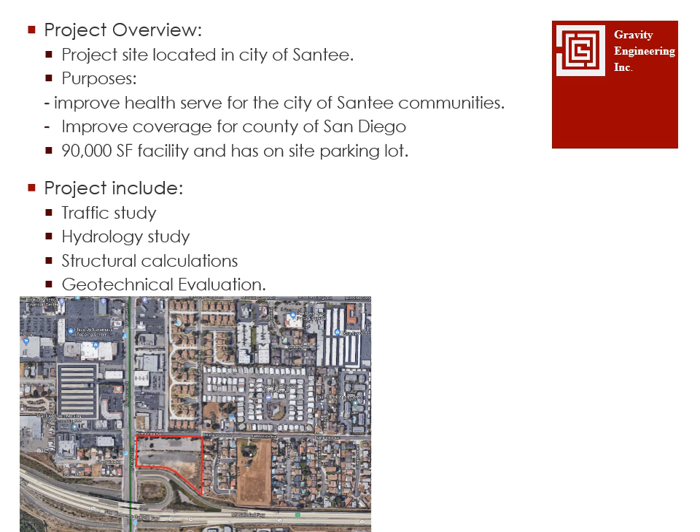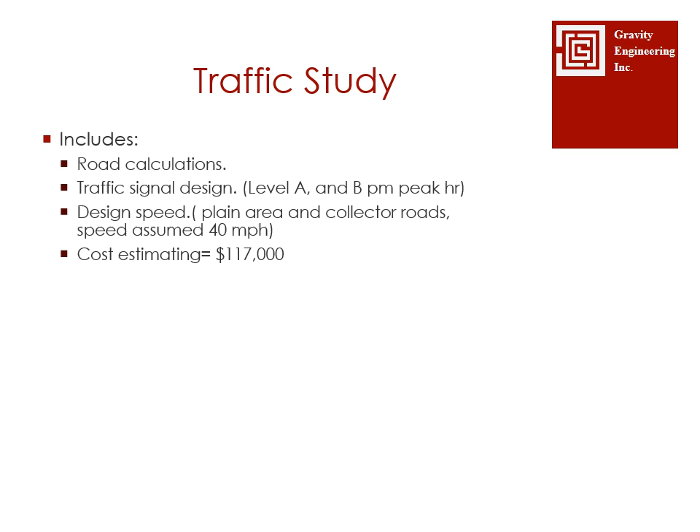This project includes traffic study, hydrology study, structural calculations, and geotechnical evaluation. The traffic study includes road calculations, traffic signal design, design speed, and cost estimating.

The traffic study of the project is located in the city of Santee, and looks at the impact on the Cuyamaca Street and Buena Vista Avenue intersection. This study will help to know the situation of the area for car movement and average daily traffic.

The roads around the project site are collector roads, and the area is plain, so we assume the speed is going to be 40 miles per hour. We redesigned the traffic signal design, and we find that the level of service is going to be A, assuming the volumes.

Also, according to the city of Santee, the intersection of Cuyamaca Street and Buena Vista Avenue has a level of service A during the AM time and a level of service B during the PM time.

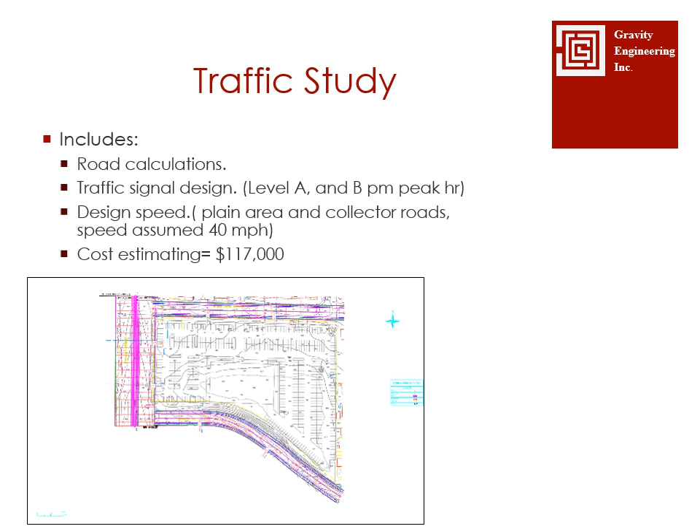This is the water and sewer study, and this is the project site plan. In water and sewer, we did the following study.

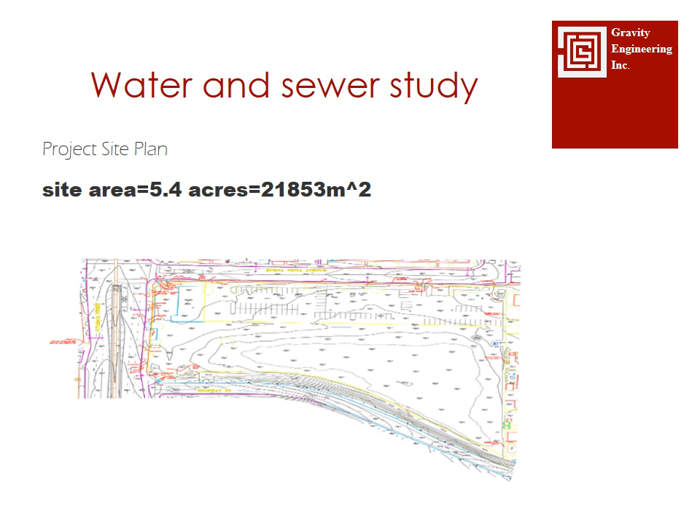To find both average and maximum water demand, the average population is 500 and the average per capita demand is 60 liters per day. Using those numbers, we calculated the average and maximum water demand. The average water demand was 30,000 liters per day, and the maximum water demand was calculated using a factor of 1.5.

Which gives us 45,000 liters per day. Also, both peak hourly consumption and fire demand were calculated as the following: 67,500 liters per day for peak hourly consumption and 716 liters per minute.

For fire demand, the largest water demand turned out to be 1,076,040 liters per day. Finally, the study showed that the design is compatible with current water and sewer limits. Therefore, our recommendation highlights that an upgrade is not required.

Hi, this is Mohammed. I'm going to talk about the structural study of our project. The main objective of this study is to do a structural analysis and design for the medical office building for Sharp in the city of Santee.

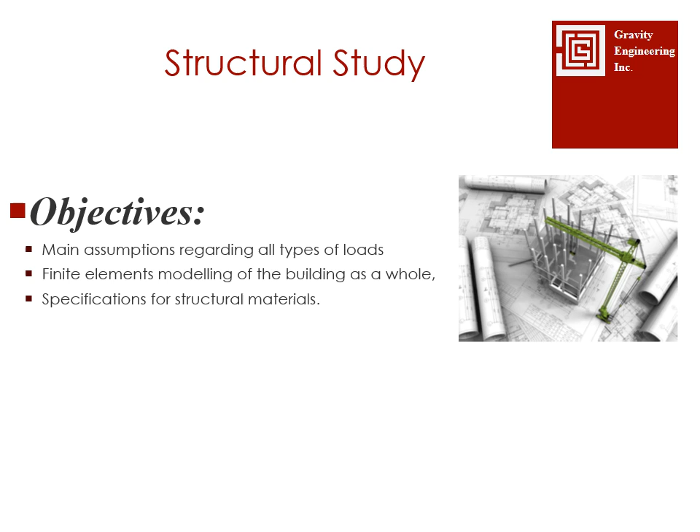To design our building in this project, we relied on using some of the common standards in the industry. For example, we have the ASCE, the American Society of Civil Engineers manual. We use the AISC, which is the American Institute of Steel Construction, and finally the IBC 2015, the International Building Code 2015.

For this building, we used two types of materials, which is first the carbon structural steel with the specifications ASTM A36M and the ASTM A53 and A53M.

Also, the second material used in this building is concrete. For the medical offices building, a compressive cylinder concrete strength is assumed to be equal to 30 megapascal.

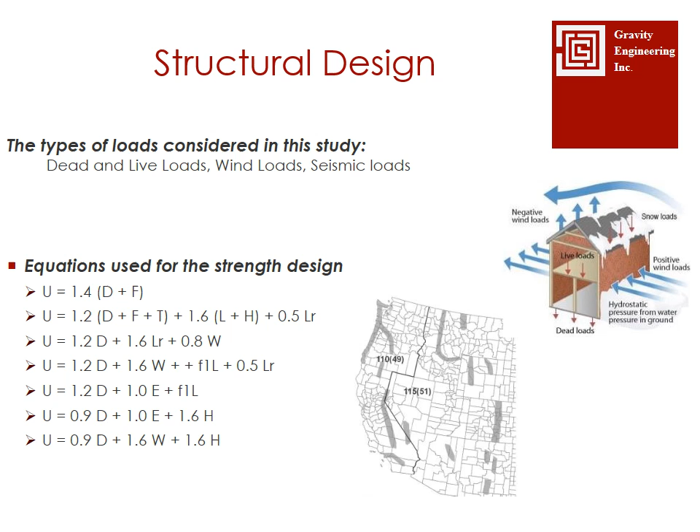Hello, my name is Keenan Alhabi, and I will be talking in more depth about the structural design.

The columns and the main and secondary beams are modeled as frame elements. Floor deck and roof sheets are modeled as deck elements.

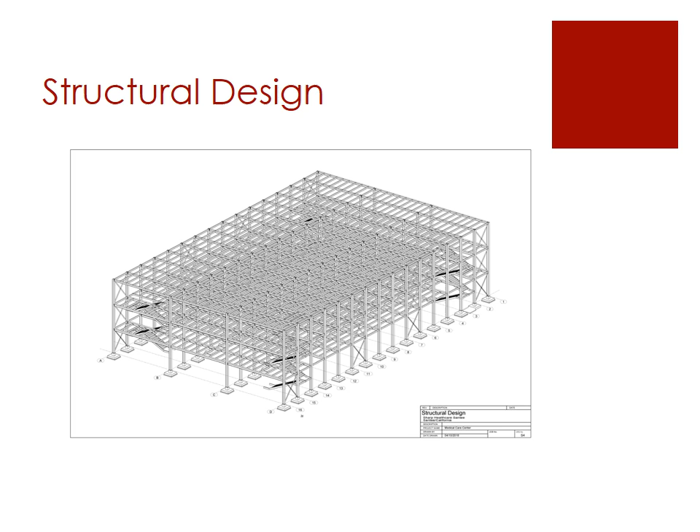Now let's talk about our design of beams for typical floors. As mentioned before, we used ETABS for our design. We also used AutoCAD as well.

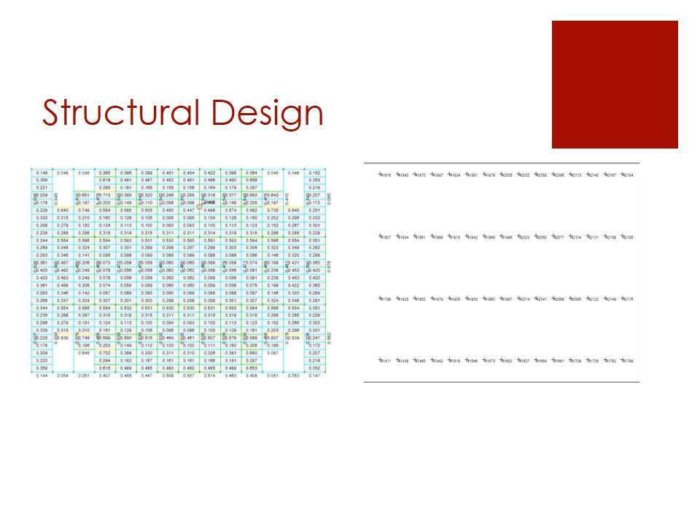From the picture on the left, this illustration shows the ratio between the actual stress and the allowable stress. From the picture on the right, this is our foundation design, which we extracted from ETABS. Lastly, for the structural design, we have included some cost estimation.

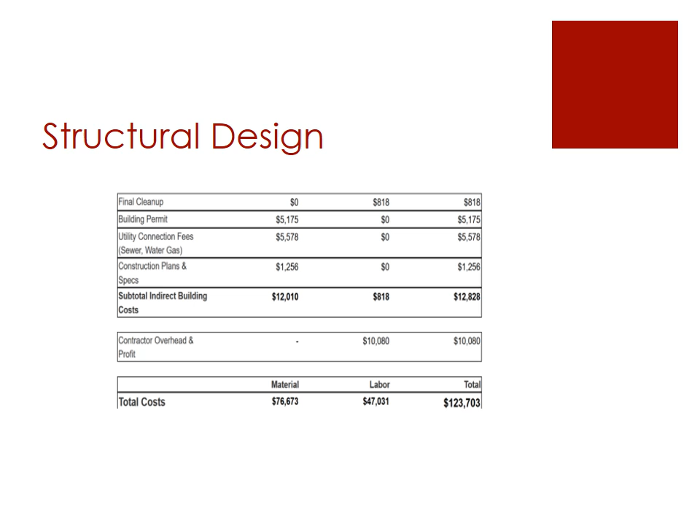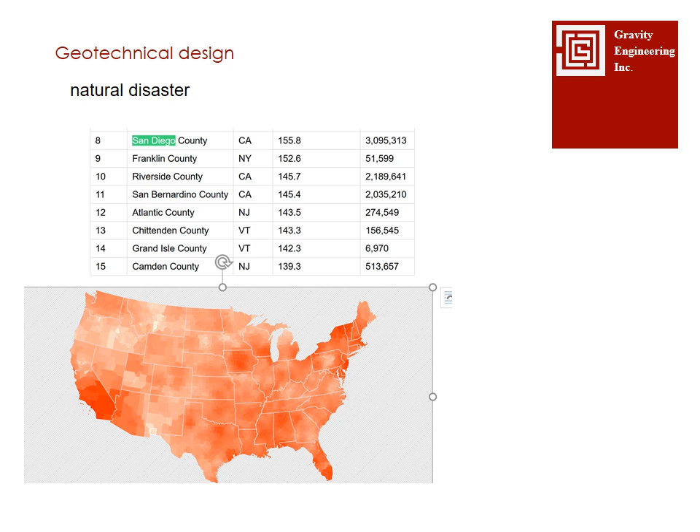For the geotechnical design study, we computed the natural disaster risk in San Diego County. Compared to other counties, San Diego actually has very high chances of getting natural disasters. If you look clearly at the map, you can see the San Diego area is mostly red, meaning a higher chance of natural disaster. Knowing that, in the calculation we designed footings, walls, and piles to strengthen the foundation of the building.

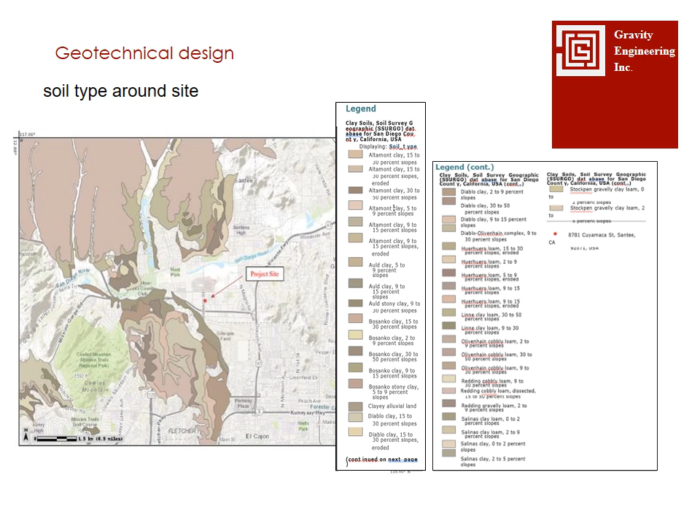On the next slide is the soil type around the site. If you look closely at the map on the left, you can see a red dot in the middle - that's where our medical center is located. It shows the soil type all around the map. With the soil type, we can calculate the phi and the strength of the soil, so we can compute the footing size and shallow foundation design.

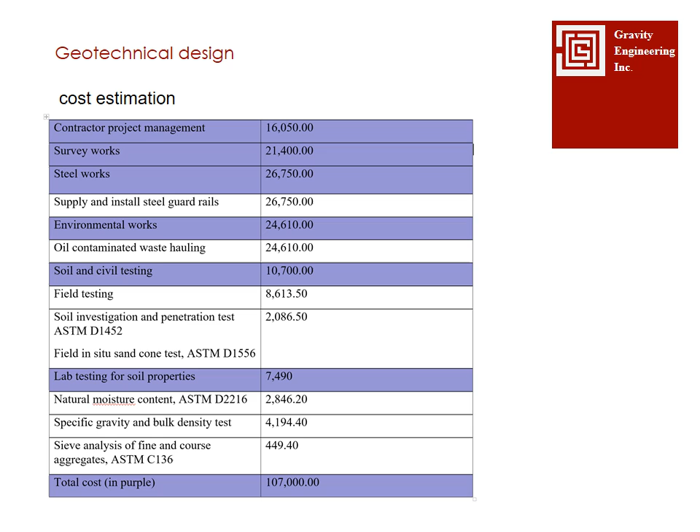For the lab testing, after we've done the outside or site testing, we take the sample and test it in the lab. This includes natural moisture content, specific gravity, and bulk density tests, and sieve analysis of fine and coarse aggregates. The total cost of geotechnical design is $107,000.